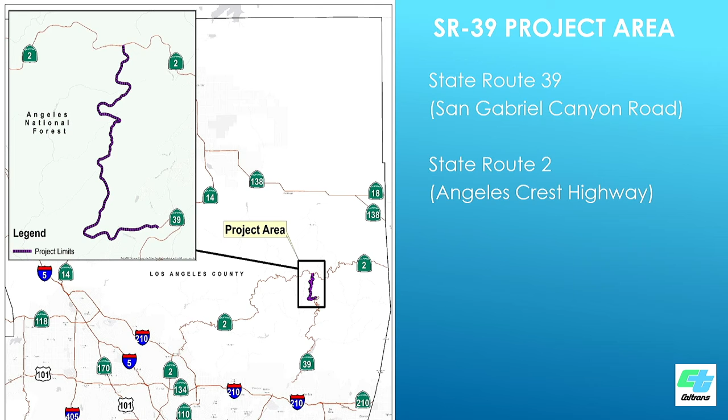So, as most of you are probably aware, State Route 39 is a winding, narrow two-lane road. It traverses rugged terrain and connects the San Gabriel Valley to State Route 2 in the San Gabriel Mountains. It provides access to the Angeles National Forest for hiking, camping, and a variety of recreational activities, but the last 4.4 miles of this road have been closed for many years due to rock slides. Before that closure, State Route 39 provided another route to access the mountain community of Wrightwood and the cities in the high desert.

A little bit of background about this section of roadway. It's been closed since 1978 because of unstable slopes above and below the roadway. We're talking about the area just north of Crystal Lake Road up to State Route 2.

There are frequent rock slides that send dirt and rocks onto the road, making it unsafe for people to use. Since 1990, Caltrans maintenance crews have been maintaining this section by clearing debris and making repairs, but they're basically just doing enough to keep the road open for Forest Service personnel and emergency personnel like the Sheriff's Department and fire forces. It's just a minimal effort that's been done for the last several years.

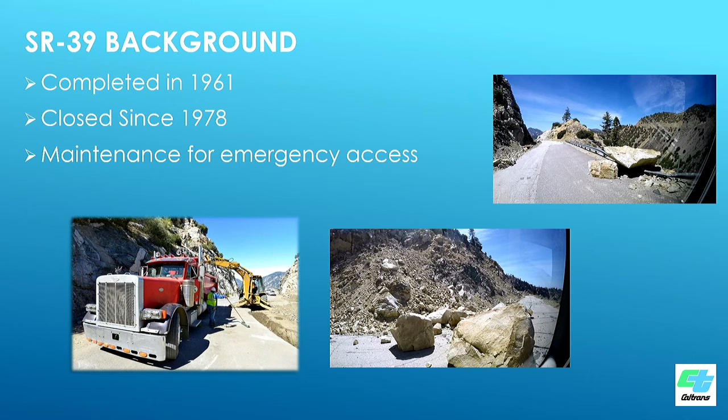We have made other attempts to open this section of roadway. Back in 2009, an environmental document was prepared and a project was approved to reopen this segment by implementing major construction work to stabilize the damaged roadway.

The first phase of that project restored 5 sections of the collapsed roadway, completed back in 2011. However, due to a combination of factors including escalating construction costs, fiscal constraints at the time, the geological instability of the area, and the fully protected status of the Nelson's bighorn sheep, the preferred alternative selected and approved in 2009 was no longer deemed viable.

So in May of 2012, Caltrans terminated the previously chosen alternative and selected the no-build option, which basically put an end to that project.

However, Caltrans and others still believe there's value in reopening this segment of the roadway, so we initiated a new project a few years back to do that.

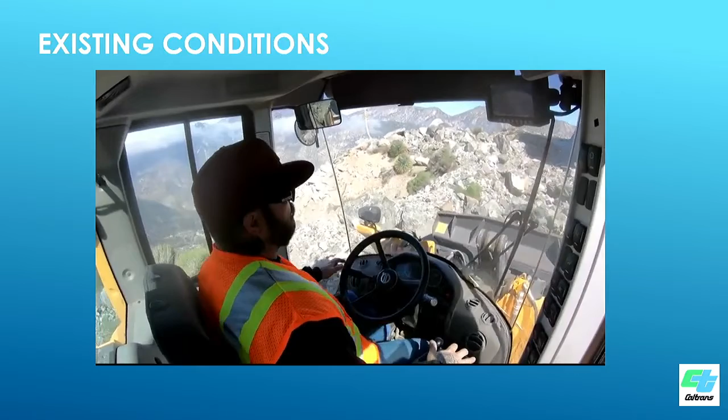Obviously, there's a lot of debris that comes down off this hillside onto the roadway, damaging it. That needs to be removed periodically so emergency vehicles can get through. There's some of the damage that has occurred in the past.

Okay, so that was just a little bit of what it actually looks like up there and some of the issues we have to deal with regarding rockfall and such.

I want to talk a little bit now about the project purpose and need. Basically the purpose and need is really the driving force behind our projects. You can think of the need as identifying the problem or problems we're trying to solve, and the purpose identifies the goals or objectives that address those problems.

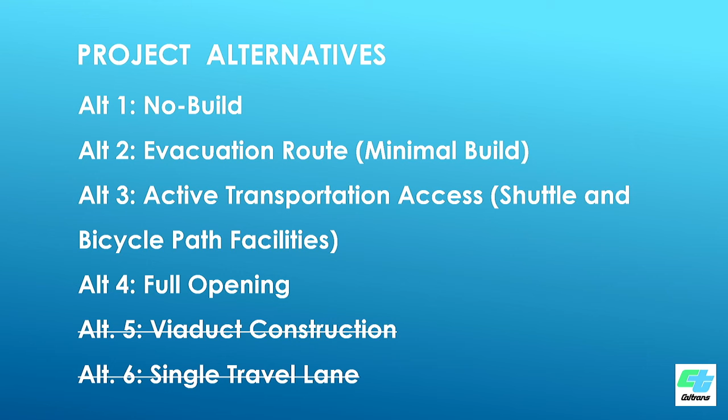When we started our evaluation of the project, we had a no-build alternative and 5 build alternatives identified. Over the last several months, 2 of those alternatives have been eliminated. The viaduct alternative was removed because of excessively high cost and because of changes to the status of the bighorn sheep—it no longer appears necessary to completely move the roadway away from the hillside. The single travel lane alternative was eliminated because the expected cost savings weren't there once we got further into our analysis, and more importantly, there were safety concerns we weren't able to resolve satisfactorily. So that leaves us with 3 build alternatives and the 1 no-build alternative.

You can probably tell from the names of the alternatives that as you move from alternative 2 to 3 to 4, we get progressively increasing access to that closed segment—from basically emergency access only all the way to a full opening.

The no-build alternative proposes to maintain the existing road with no improvements. Caltrans would continue to perform the minimal maintenance activities we do today, just enough so the road can be used by emergency personnel, but basically nothing else.

Alternative 2, we call it the evacuation route. It proposes to rehabilitate the pavement and maintain the closed segment as an evacuation route. It involves limited roadway restoration—the road would continue to be closed to the public, with highway traffic and access strictly limited to emergency service personnel, Forest Service, and our maintenance crews. Construction components include reconstructing the pavement with new asphalt, restoring some damaged drainage systems, removing roadside obstructions such as boulders, trees and debris, repairing and constructing soldier pile walls to stabilize failed pavement sections, and upgrading the guardrails on the roadway.

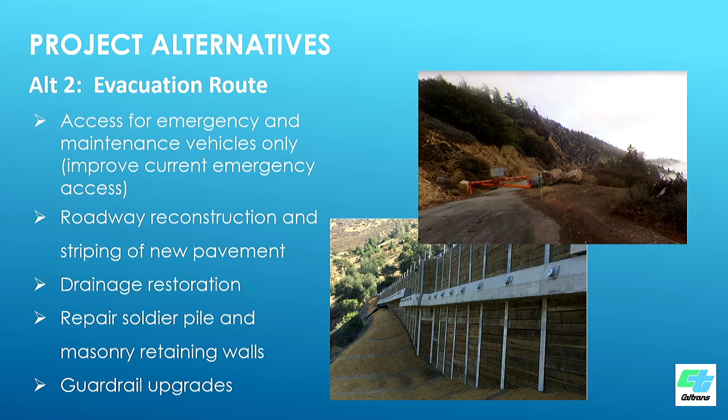Alternative 3 is the active transportation access alternative. It would include the roadway improvements mentioned for alternative 2, but would also include sustainable parking areas at the beginning and end of the closed section, 3 major viaduct structures, a rock shed, 5 soldier pile retaining walls, and rock scaling at 10 locations. Rock scaling is where crews go up to remove loose rocks and debris so they don't fall down when someone is on the road below—it's an important safety measure.

There would also be an on-site shuttle service operated by trained drivers carrying people in and out of the area, with shuttle speeds limited to 15 miles per hour and extreme caution used near well-marked wildlife crossings identified along the roadway. The idea is to make the road safe enough for people to enjoy outdoor activities such as hiking, biking, picnicking and camping. Emergency and maintenance vehicles will still have full access.

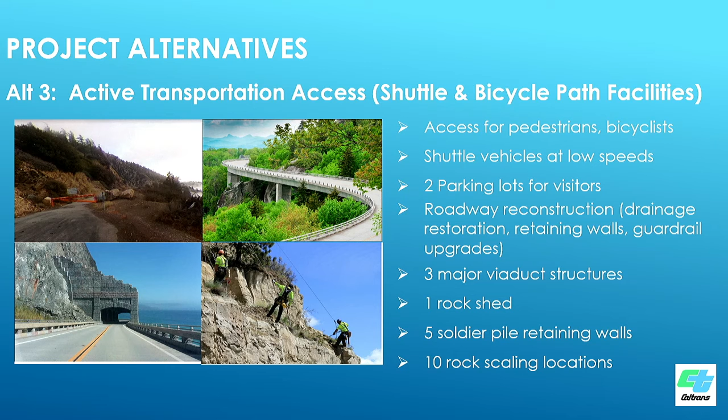Alternative 4 is the full opening alternative, proposing to rehabilitate and reopen the roadway, construct bridges and rock sheds, and install wildlife fences to protect the bighorn sheep and other wildlife. It would provide unrestricted access to through traffic between Interstate 210 and State Route 2. The proposed elements are the same as alternative 3, except there are no parking lots—instead we're proposing to convert the junction of State Route 39 and State Route 2 into a roundabout. This alternative would also add 2 additional viaducts at various locations to facilitate wildlife crossing and install continuous barrier fencing to keep bighorn sheep off the roadway.

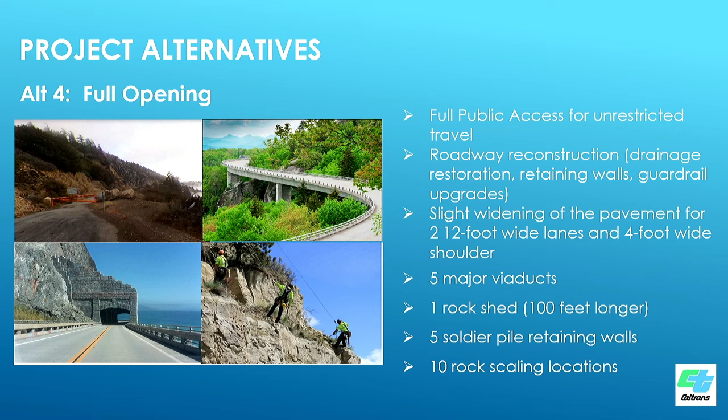These are some of the common design features of alternatives 2, 3, and 4: roadway rehabilitation, roadway delineation or striping, clearing away debris, repairing drainage systems, and retaining walls to capture any debris that might come down off the slopes.

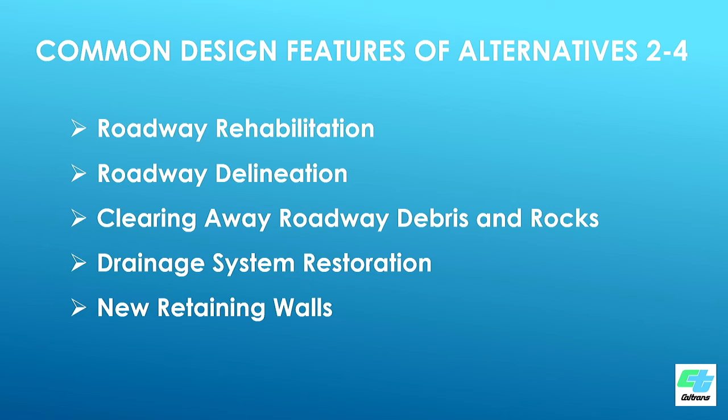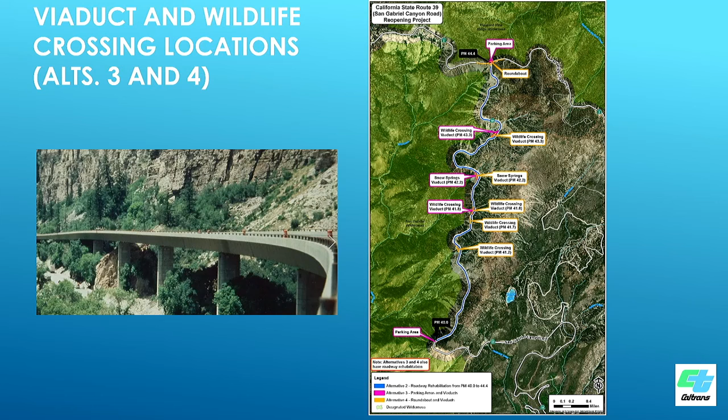As I mentioned earlier, improving the ability of emergency response personnel to get up and down the mountain is a key element driving this project. As you might expect, the 3 build alternatives have different degrees of success at achieving that. Alternatives 2 and 3 would improve the roadway, but because it would be restricted and not completely open, the gates would be closed. Therefore, emergency personnel would have to stop and open those gates before they could pass through. For alternative 4, the road would be completely open with unrestricted access, so it would provide quicker and more efficient access for emergency personnel.

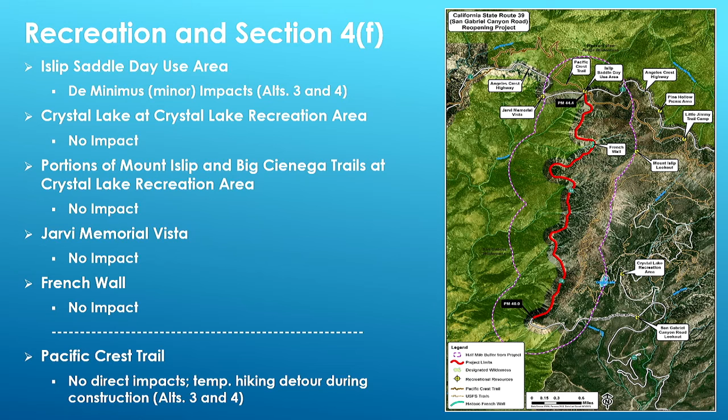We looked at wildlife movement corridors, and there are no known corridors in the project area. There were no sensitive plant species observed during our surveys. Wetlands and waters would be minimally impacted - we have 10 drainages that cross the roadway, most of them are ephemeral, I think only one is permanent, and that's the Snow Springs area. Total impacts would be, depending on alternative, pretty small.

We did not find any threatened or endangered species within the project area, and we don't anticipate impacts from invasive species. We'll take steps to avoid that.

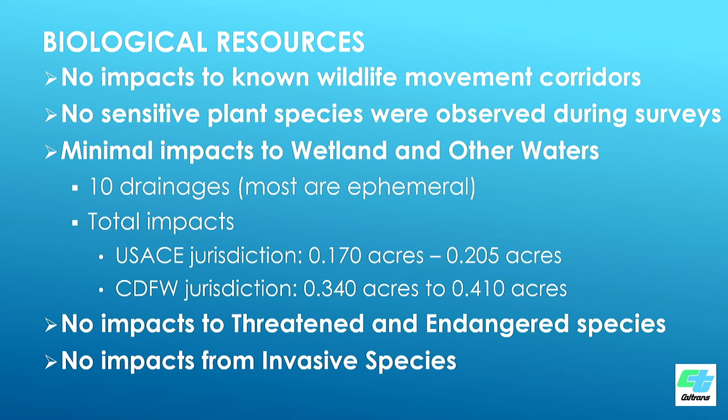There are some threatened or endangered species in the general vicinity of the project, including the least Bell's vireo, southwestern willow flycatcher, southwestern mountain yellow-legged frog, and other species. We know they're in the general vicinity, but they were not observed during our previous surveys. We will be doing additional surveys prior to construction as the project moves forward.

Along the project area, we have 5 different natural community types. 3 of these would be affected by the project. As we move from alternative 2 to 3 to 4, the potential impacts get progressively greater because of the additional work that would be done.

It's important to remember that this corridor or work area would be 4.4 miles long, and any impacts would occur in a very narrow strip adjacent, just upslope or downslope of the roadway. Any areas that are temporarily impacted would be revegetated and replanted, so we would address those temporary impacts.

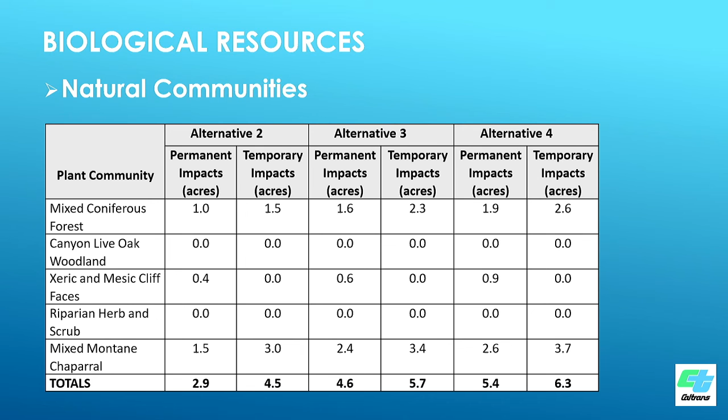One resource that's front and center in people's minds for this project is the Nelson's bighorn sheep. It's not listed as threatened or endangered, but it does receive special attention from the Forest Service and from California Department of Fish and Wildlife. So coordination with those agencies is crucial to any project that might move forward.

We know the bighorn sheep are in the area. We've seen them near the roadway. We've seen them walking on the roadway. So we know they're there.

Except under very limited circumstances, the California Fish and Game Code does not allow anyone to harm or kill a fully protected species, including bighorn sheep. Their status is kind of changing, or has changed recently. Last year Senate Bill 147 was signed by the governor, amending the state's fully protected species status. Now it refers to the bighorn sheep as fully protected, except for the Nelson subspecies. So there's a change there that we need to be aware of and address, and we'll work with California Department of Fish and Wildlife on that issue.

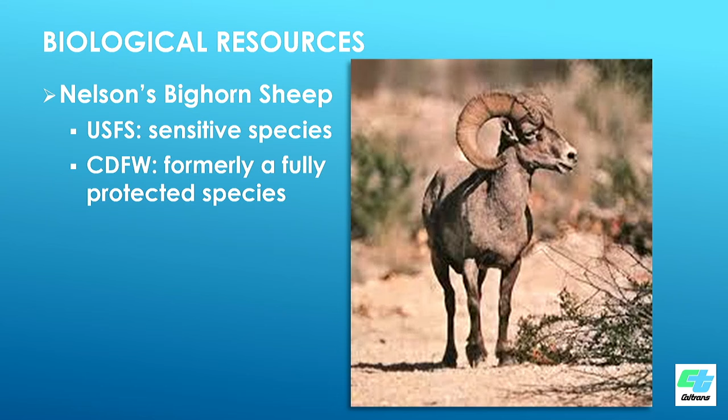We have and continue to design this project to minimize potential harm to the sheep. Because of this change in status, we don't yet know what kind of permitting mechanism might be required by Cal Fish and Wildlife, but we will be working with them as this project moves forward to make sure we address their concerns and the Forest Service's concerns regarding the sheep and other species.

Looking at visual and aesthetic issues, alternative 2 would have minimal impact, little change to the existing features. Alternative 3 would have a moderate impact because of the addition of the viaducts and the rock shed. Alternative 4 would have a little bit more visual intrusion because of the additional viaducts and the wildlife exclusionary fencing.

Whatever alternative is selected, we will minimize those impacts by giving these elements aesthetic treatments to help them blend into the surrounding environment. So we will address that issue.

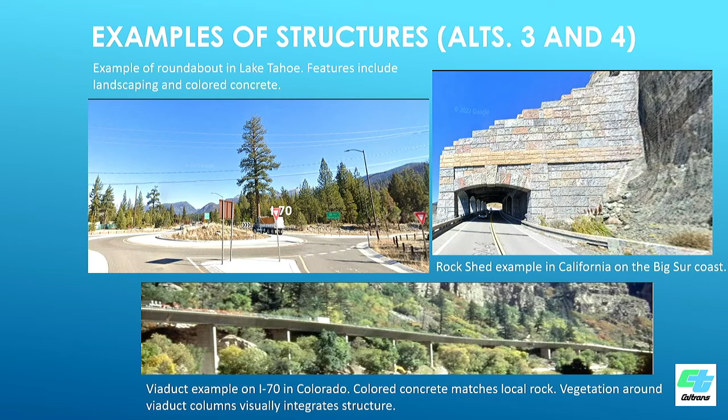So where do we go from here? The next steps are that the draft environmental document is available for public review. This meeting is being recorded and will be viewable on the Caltrans YouTube channel. The meeting presentation will be posted on our Caltrans District 7 website. We're in the middle of our 60-day public comment period, which will close on May 11th. We encourage everybody to provide comments prior to that date.

We have another virtual public hearing coming up on Saturday, so if you would like to hear this information again, it will be available then. We also anticipate having our final environmental document ready by the fall of this year, and final project approval next spring.

We would like to hear from you. That's why we've invited you here. We would like to hear your comments on the draft document, on the impacts, the alternatives, the mitigation measures, or anything else you'd like to comment on. If you have questions, we will review and answer those in the final environmental document. Again, we would like for you to provide comments by Saturday, May 11th. All comments will be included in the final document along with responses. This is your time to let us know what you think, good or bad, and we will take your comments seriously—they will help inform our decision as we move forward.